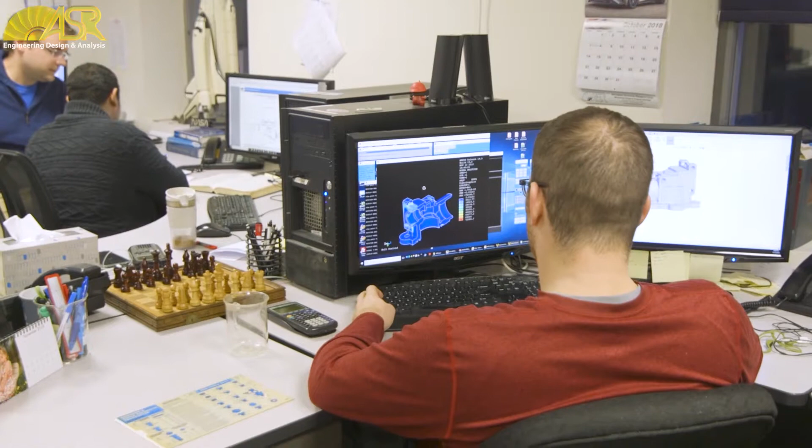ASR was founded in 1995 with the mission to provide state-of-the-art mechanical engineering services to a wide range of businesses. Since then, we have helped improve products in industries ranging from aerospace, industrial, electro-optics, electronic packaging, power generation, consumer products, and many more. We understand that in today's fast-paced marketplace, the only way to stay ahead of the competition is to be the first to market while delivering the best value to your customers through innovative solutions.

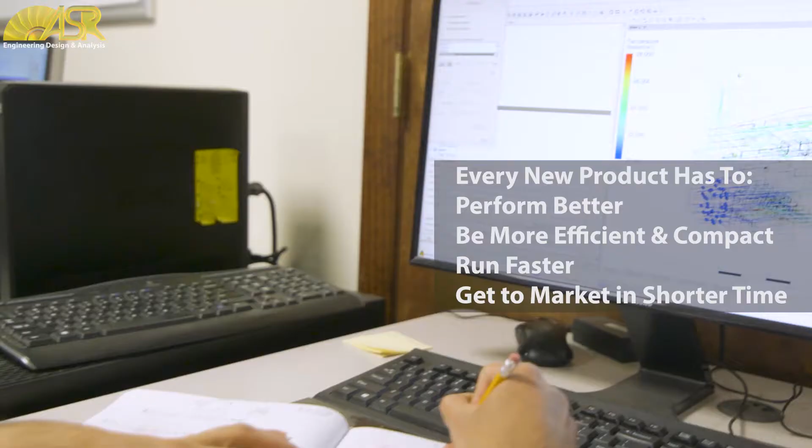Every new product has to perform better, be more efficient, more compact, run faster, and get to market in shorter time to be successful. Our concurrent engineering process allows us to simultaneously design a product while analytically verifying performance. We are focused on using our tools and experience to find innovative and actionable solutions to product development and life cycle challenges.

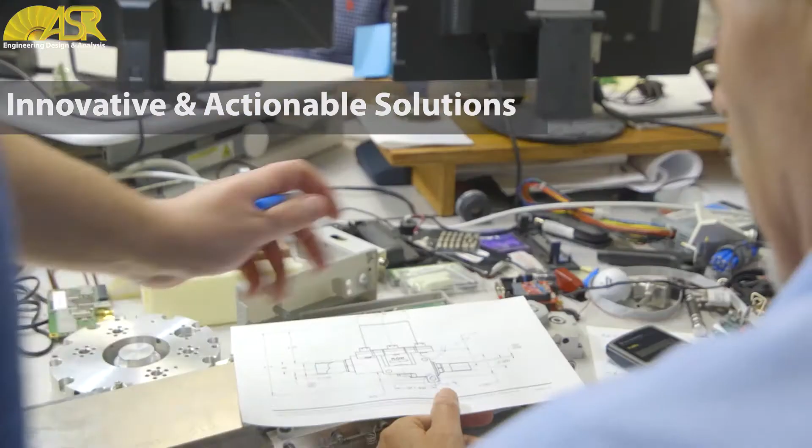The final deliverables of the design service are a full set of drawings with bill of material, including 3D part definition for manufacturing.

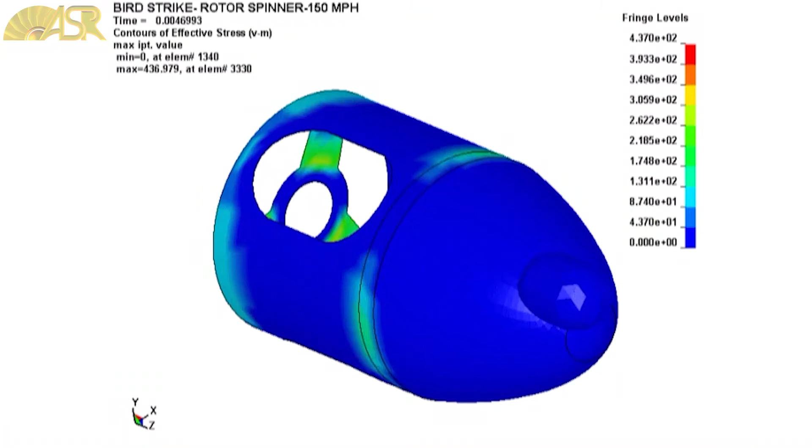Analysis is used to ensure a product meets performance requirements. These requirements include everything a product or system is expected to do. There are dozens of analysis types. Common analysis examples include stress for durability and heat transfer and flow analysis for temperature limitations and survivability.

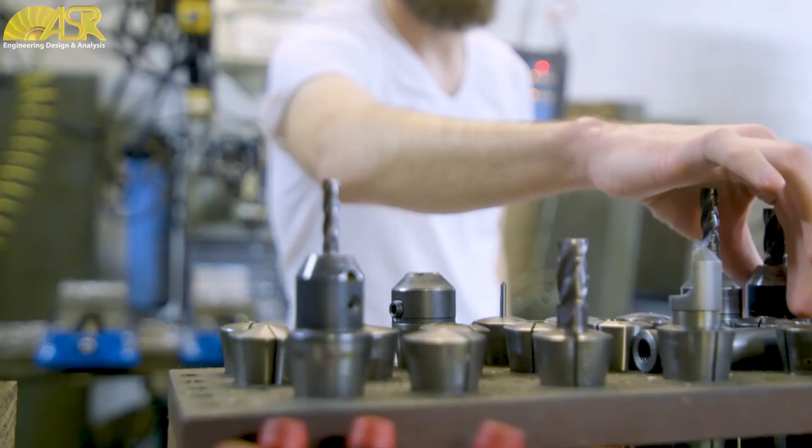To assist our clients in transitioning a product from design to prototype and production, ASR has a well-established network of manufacturing shops that are experts at prototype and production work. We will help you get a cost-effective prototype fabricated and support your transition into production.